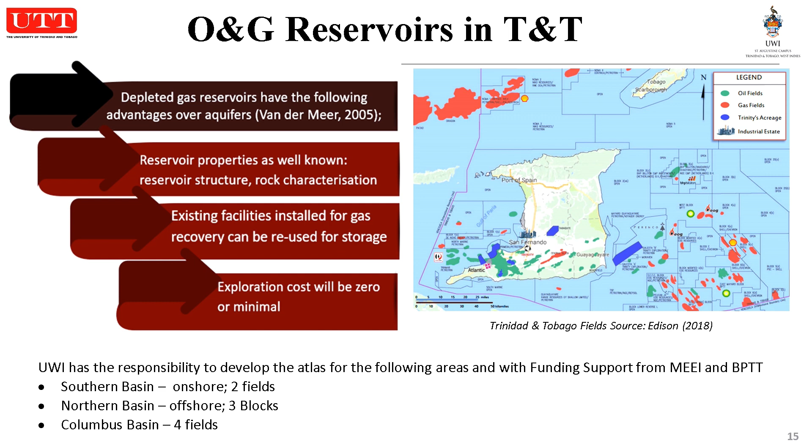The UWI is also responsible for certain fields in the Southern Basin onshore, 2 fields; offshore, 3 blocks; and the Columbus Basin, 4 fields. The UTT developed the calculator for doing the volumetric calculation, and we developed the workflow for determining the parameters required for the calculator.

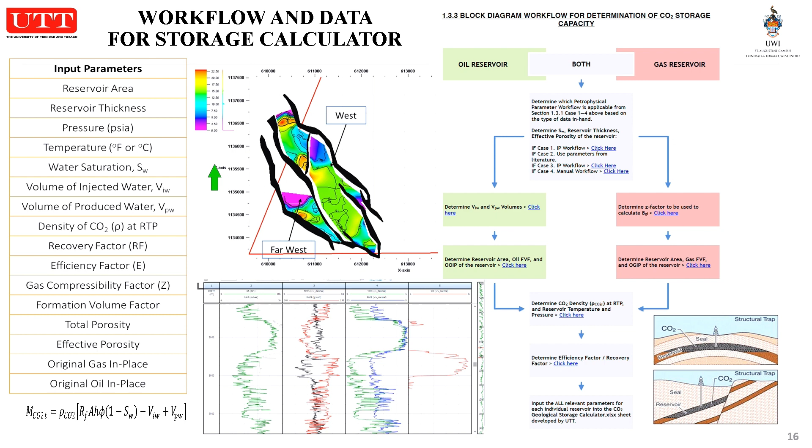We use students and graduates who were contracted to work on the storage atlas project so as to build local capacity. More data is needed to estimate the full storage potential of the reservoirs.

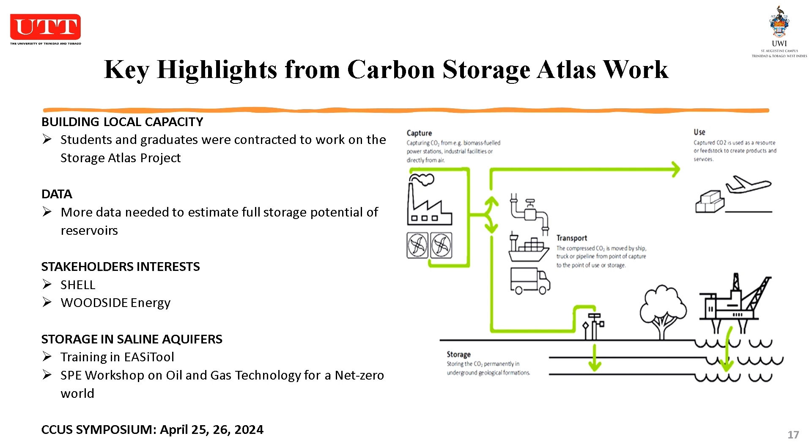Shell has partnered with us since 2022 and has provided funding support. Woodside Energy is expected to come on board soon. We are also planning a CCUS symposium in 2024, on April 25th and 26th. So keep a note of the date.

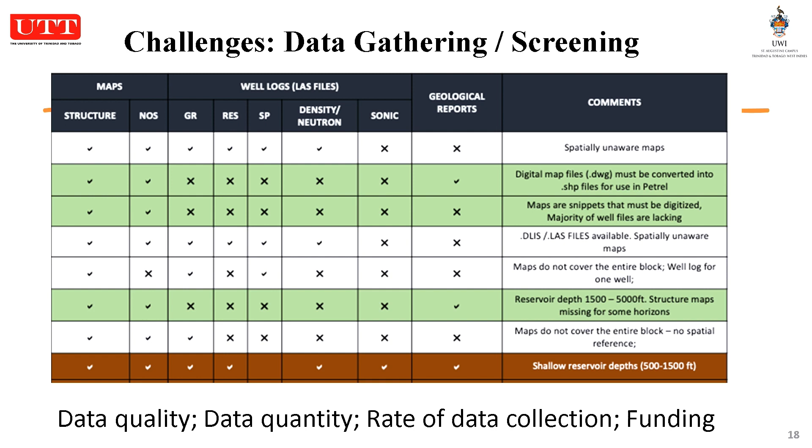Data were obtained, but not as timely as expected. The data was screened and cataloged, and where complete data sets were not available, we used offset data and analog data.

There are future opportunities for UWI and UTT, which include collaboration between the CCS and the CO2 EOR working team, development of carbon and gas management programs and courses, and the establishment of a center to drive relevant projects, to develop a proposal for a pilot CCS project, and to also conduct combined projects, for example blue and green hydrogen and direct air capture. We would also like to have short programs and full MSc programs delivered by that center.

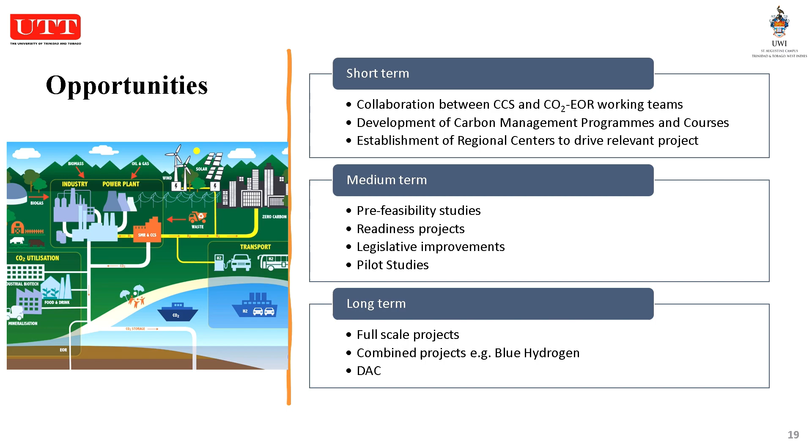I will now move on to the next part of the presentation, on hydrogen. Hydrogen can occur naturally as a pure gas; however, it rarely exists on its own and is commonly found with water and methane molecules.

There are two main ways to extract hydrogen, which have been presented by previous presenters: electrolysis, using electricity to separate the hydrogen and oxygen ions in water, and methane reforming, in which steam and methane, and sometimes oxygen, are reacted at high temperatures and pressures.

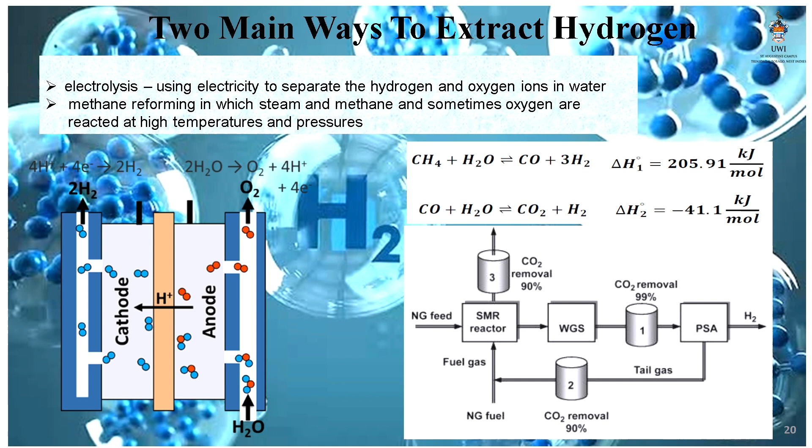The water required has to be of very high quality, with low concentration of salts and minerals. It must also be equivalent to or lower than potable water, and such high quality water is scarce and has increasing demand for domestic needs.

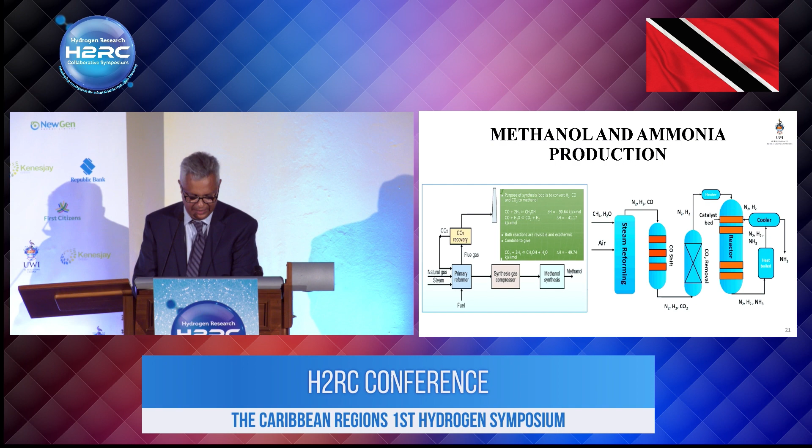This data was also presented by one of the students: the demand for hydrogen was estimated at about 90 million metric tons in 2020, and the amount of CO2 released was about 900 million tons. This CO2 can be captured and stored.

Gray hydrogen can be transformed into low carbon blue hydrogen by capturing and storing the CO2. In Trinidad and Tobago, methanol and ammonia are produced by the steam methane reforming process.

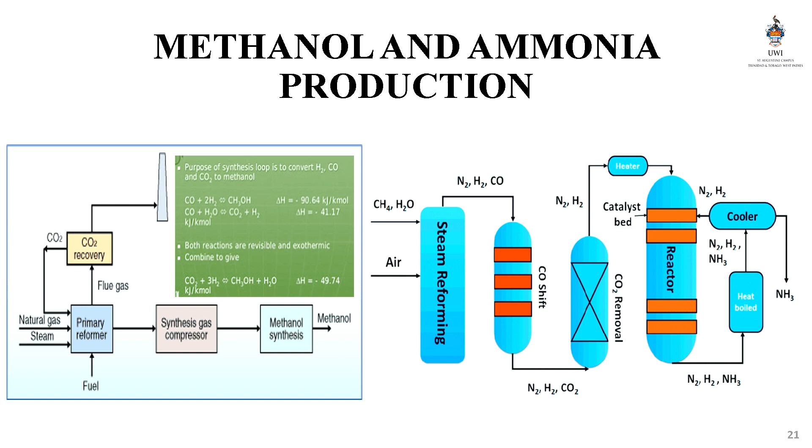Now we have seen green hydrogen and blue hydrogen, and how blue hydrogen is produced by the steam reforming process. Green hydrogen can be produced from wind or solar energy, which provides the electricity for the electrolysis process.

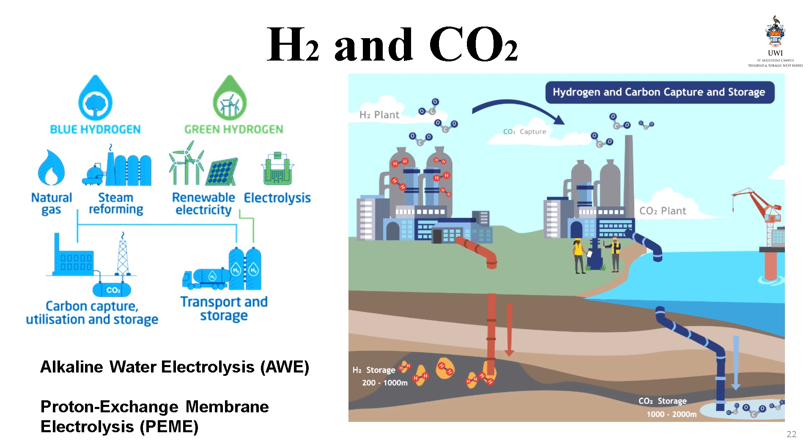Alkaline water electrolysis has some advantages over proton exchange membrane electrolysis. From studies conducted by the department, we have shown wind energy to be the most favorable form of renewable energy to provide electricity for green hydrogen generation by alkaline water electrolysis for Trinidad and Tobago. We can obtain green ammonia and green methanol using wind energy and the electrolysis of water.

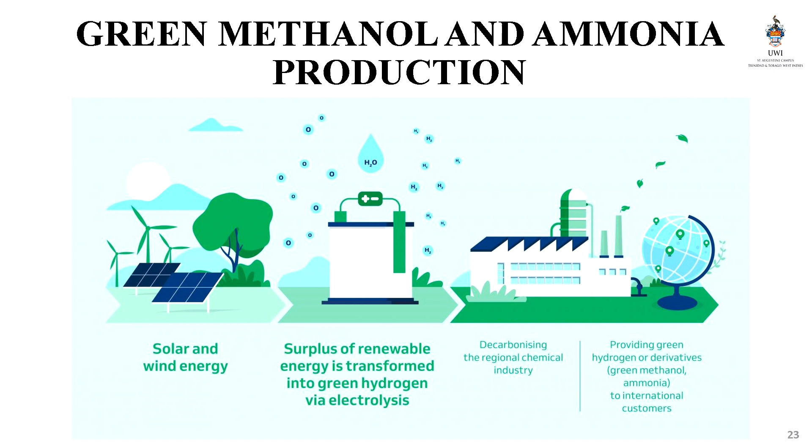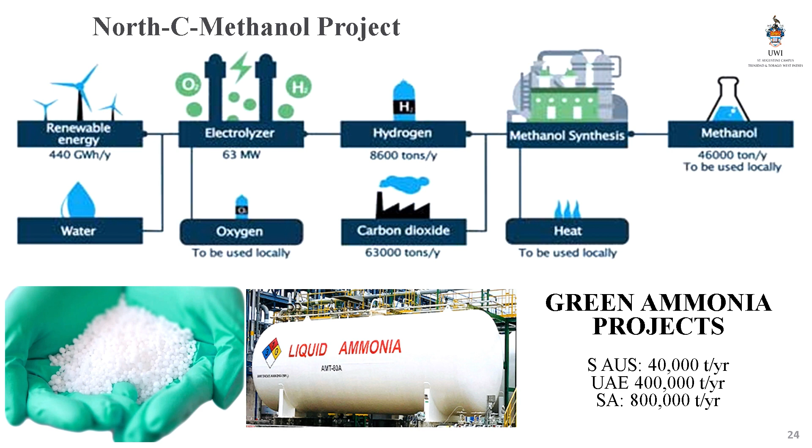Looking at this slide, the Proman North-C-Methanol Project is the first large-scale renewable hydrogen to methanol complex of the North CCU hub, established in Belgium. We also see that green ammonia facilities are being developed in South Australia, the United Arab Emirates, and South Africa.

We have seen that water is essential for hydrogen production, and over 2 billion people live in water-stressed countries, which is expected to be exacerbated in some regions as a result of climate change and population growth. Globally, at least 2 billion people use a drinking water source which is contaminated.

Hydrogen project developers and the water sector must consider sustainable water sources such as desalinated, recycled water, and storm water to offset the demand for fresh water and to avoid exacerbating water stress.

Irrespective of the source, the feed water must be cleaned and deionized, taking into account water losses due to evaporation and leaks. The water ratio can range between 18 and 24 kilograms of water required to produce 1 kilogram of hydrogen.

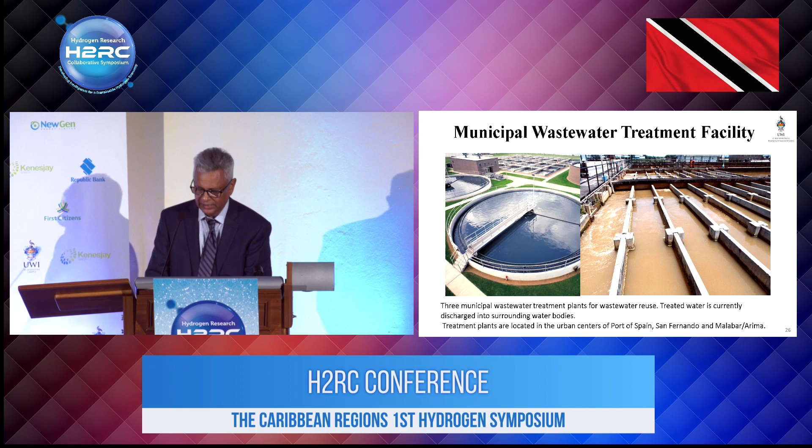The public water system in Trinidad and Tobago is supplied by surface water from rivers and dams, about 60%, groundwater from wells, about 23%, and desalinated water, about 17%.

In Trinidad and Tobago, we do not have a regular supply of water for domestic use. We have 3 municipal wastewater treatment facilities for water reuse. These treatment plants are located in the north, south, and east, for the Port of Spain, San Fernando, and Malabar Arima areas.

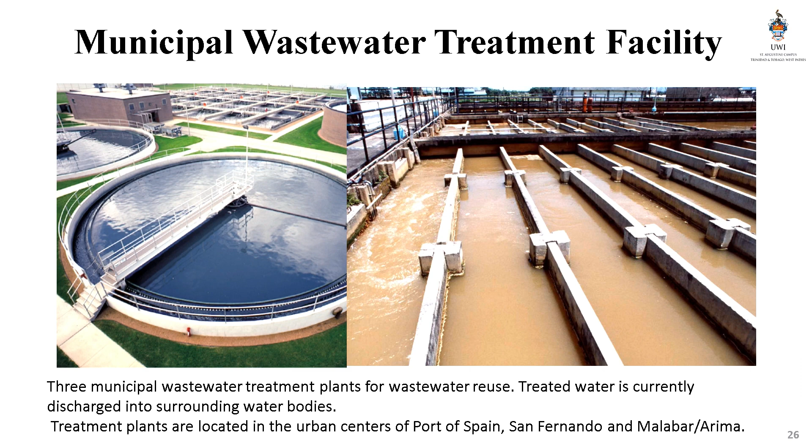In the wastewater treatment facilities, there are many processes that are involved, and I will not go through these processes in the interest of time.

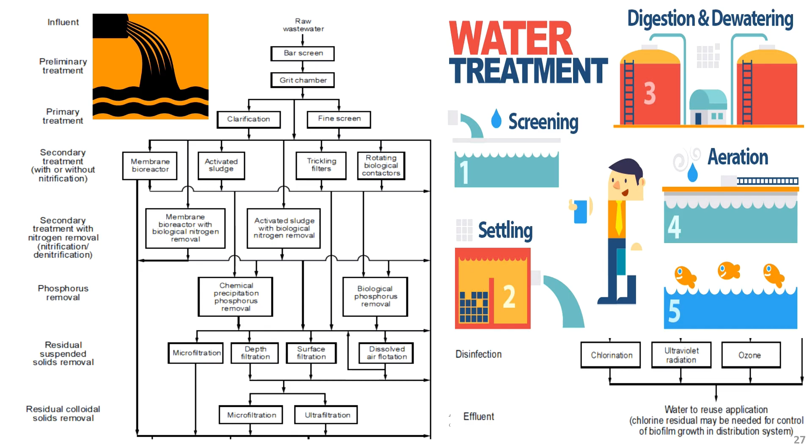From the south plant, we did an analysis of the water content, the pH content, the total organic carbon content, chloride ion, and fecal coliform count were measured, and they were found to exceed the ASTM specification of D1193-06 type 1 grade for reagent water.

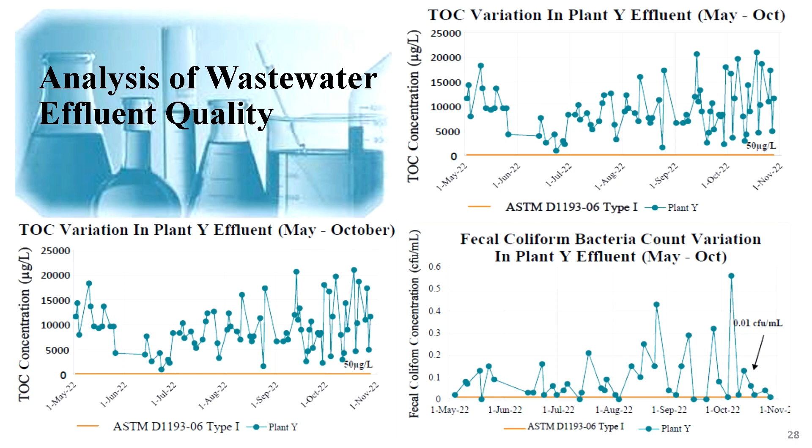What we looked at is an advanced treatment of the tertiary effluent, and that is recommended to produce the water required for use in the electrolyzer.

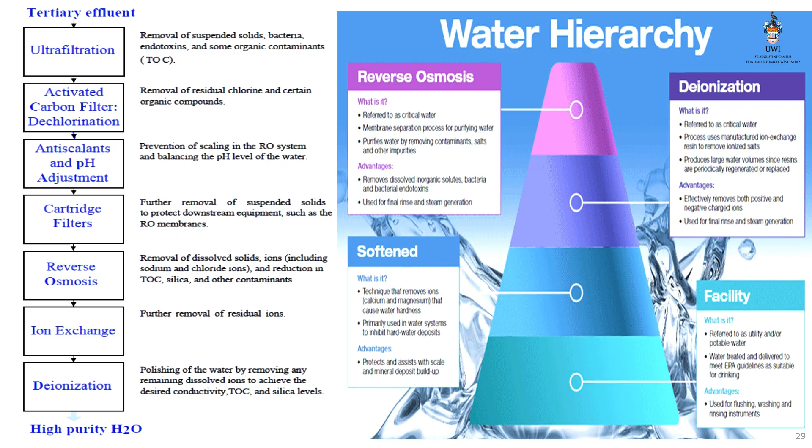Preliminary cost estimates were prepared for the required advanced treatment, and the total is about 85.6 million US dollars.

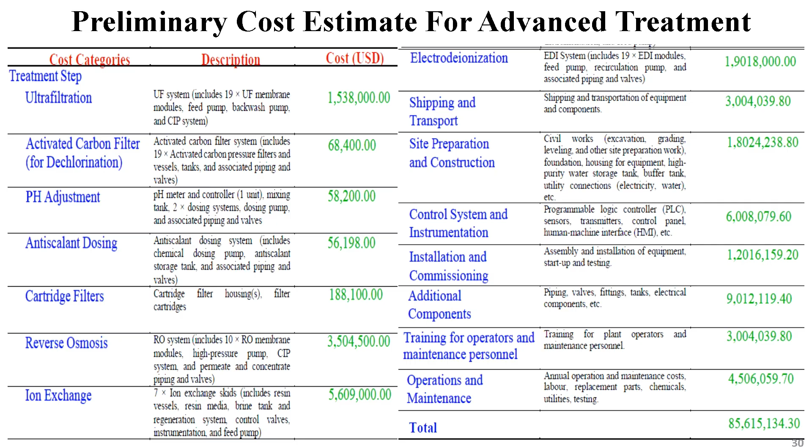2 water rate scenarios were considered for hydrogen production. The current is $3.50 per meter cube, which is the industrial rate, and a higher rate of TT $5.50 per meter cube to achieve capital cost recovery within 10 years from the start of producing high purity water.

The cash flow projection for the advanced treatment commenced in 2024, with the capital cost for design and construction evenly distributed over a 6-year period.

The start of high purity water production coincides with the projected start of hydrogen production, which is in 2030. From then on, the cash flow projections span 30 years, from 2030 to 2060, which is considered a reasonable life expectancy for an advanced wastewater treatment plant.

With the current industrial water rate of TT $3.50, positive cumulative cash flows are expected from 2051, reaching $38.5 million by the end of 2060, with a payback period of 28 years and an internal rate of return of 2.22%.

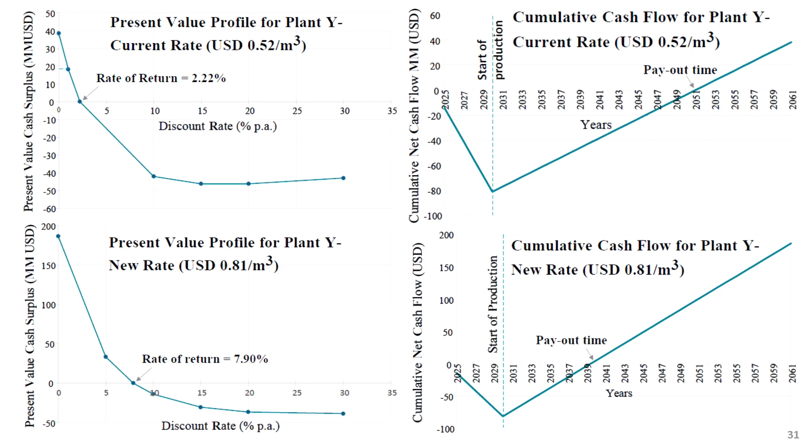This is the end of my presentation, and I would like to acknowledge the Ministry of Energy and Energy Industries, Heritage Petroleum Company Limited, De Novo Energy, BPTT, and Shell for the funding support and data provided for conducting this project, and also Ms. Amanda Hendy, who was an MSc student in the Petroleum Studies Unit, for the study she conducted on the hydrogen part of this presentation. Thank you very much.